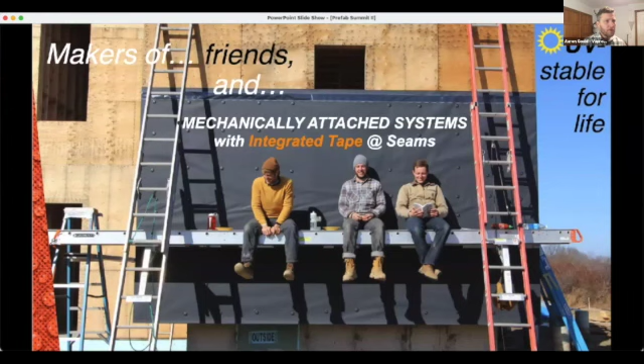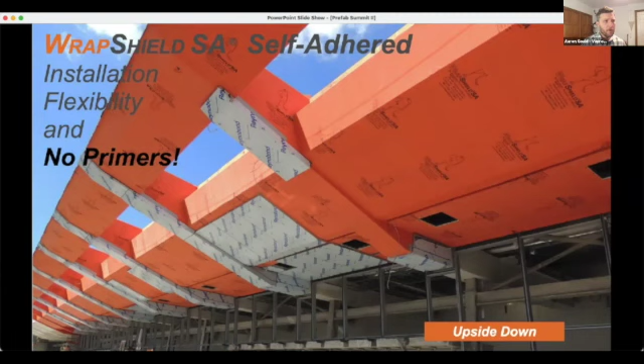We're primarily known for our self-adhered vapor open membrane systems with liquid flashing. We also have a stainless steel flexible peel and stick option. We provide a 20-year material warranty, and we can go up to 12 months of UV exposure during the job site. It's very simple: we have black for open joint rain screens, and orange for everything else. We have both mechanically attached or self-adhered membrane systems, again using either the liquid or peel and stick flashing options that we have.

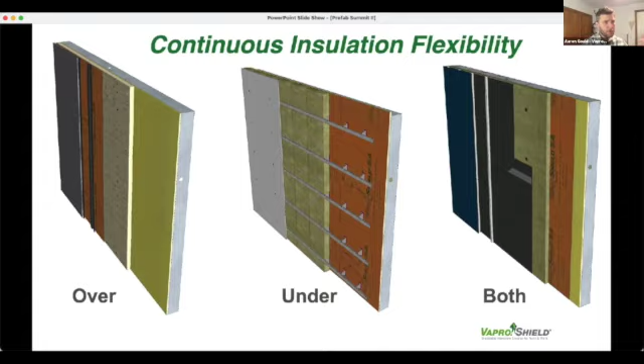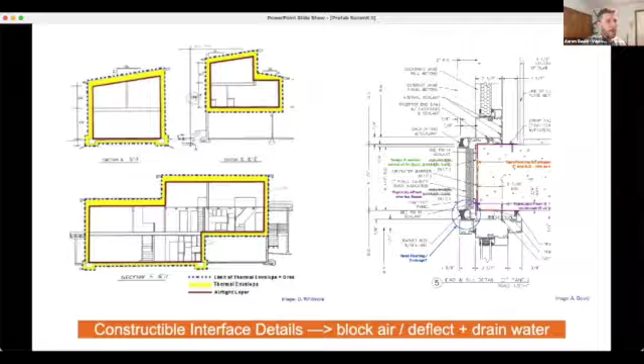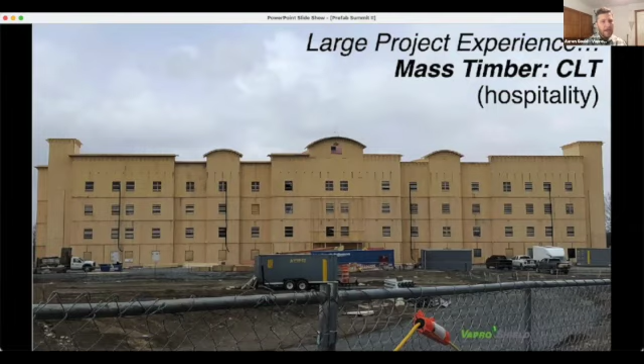We've been around the block. We've experienced a lot of large projects like Hudson Yards here in New York, a lot of mass timber. We've stayed at the forefront of that. We have an ideal solution for mass timber and panelized construction. I meant to actually have a photo of a current Passive House mass timber project we're working on - it's an 8-story building in New York right now.

But this is one that was recent, and I'll put a link up to this in the chat if you like - some of you were on this, the multifamily New Jersey project, the Condela Lofts, that was highlighted here a couple weeks ago.

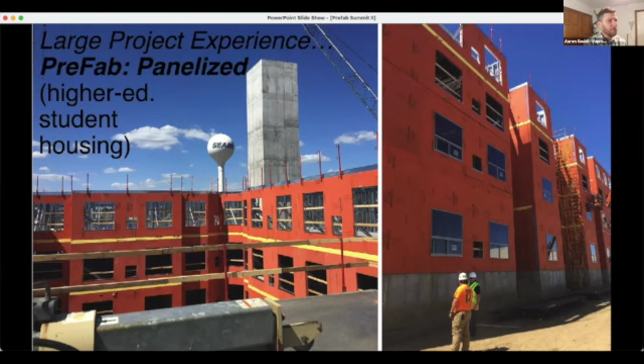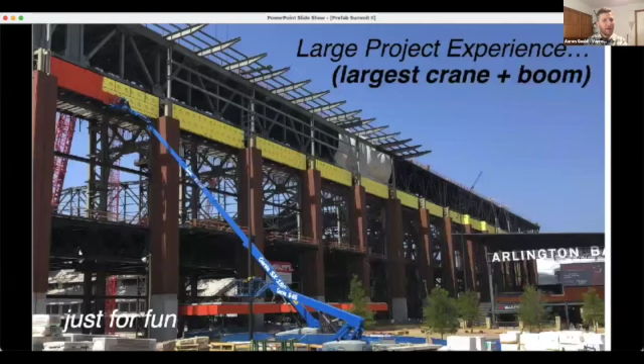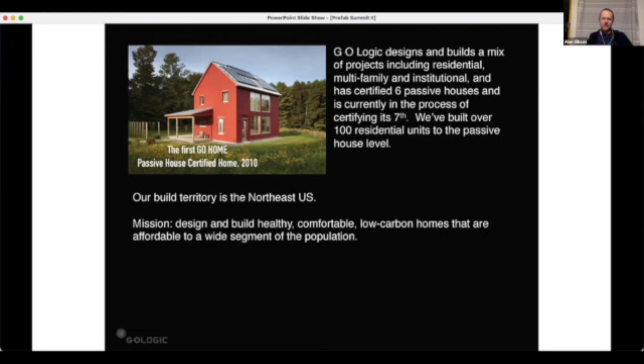Our build territory is the Northeast US. We are general contractors, so in Southern Maine we will general contract projects. Outside of that area, we will design and then deliver a shell package for others to finish. Our mission is to design and build healthy, comfortable, low carbon homes that are affordable to a wide segment of the population.

I'm not going to claim that we're an affordable home builder. We do a mix of projects, some higher end custom homes, some institutional work, but our bread and butter is single family homes.

To try to crack some of the affordability nut for Passive House, we developed the Go Home, which is a series of pre-designed homes, with models ranging from 600 to 2,500 square feet. We've built most of these multiple times.

The design process is much more streamlined because they're pre-designed, and we allow some customizations, but it allows the whole process to be more streamlined and therefore less expensive.

We've been panelizing in earnest for about three years now, really trying to go up that learning curve and figure out how to do it from scratch while taking our experience as site builders into the shop. My crew has really been figuring this out.

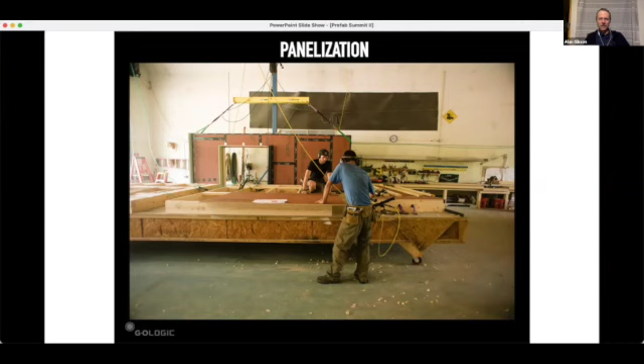Taking it from outside to inside, there are just great benefits. You're building not in the mud, in the rain, so you can concentrate better on what you're doing. We have a higher quality product. The thing about panelization that's different is you have to do most of your thinking before you cut your first stick. So there's a lot more pre-planning, and the shop drawing process is really important. That's another thing we've been working out, going from the architecture to 3D modeling and then shop drawings.

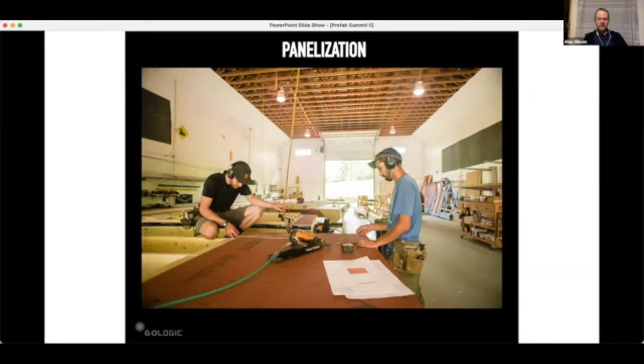We put absolutely as much as we can in the panel in the shop to make it a value-added product. We install windows and doors, air seal them, flash and put trim on them, and we add a lot of exterior insulation.

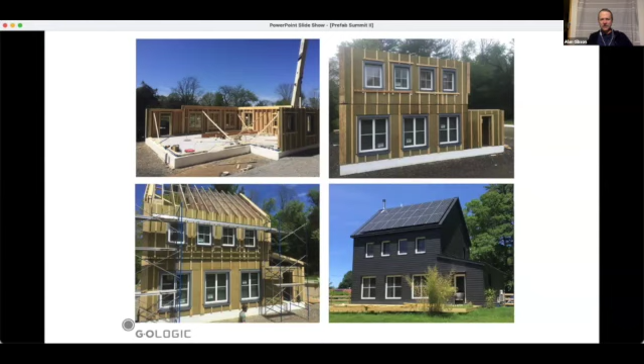Here's a typical build. This was out of state, so local GC did the foundation. We came in with wall panels, floor panels, roof structure, made an airtight, watertight shell, and then passed it on to the local builder who did the exterior finishes.

Here it is in the flesh. We use gaskets to join the panels. When we're done with our shell installation, we verify airtightness with a blower door test. We meet the Passive House standard. This is a fairly complicated thing. It's got a lot of layers, and it's all got to be right, or you're going to have a lot of mess on site. So that's really key to doing it successfully.

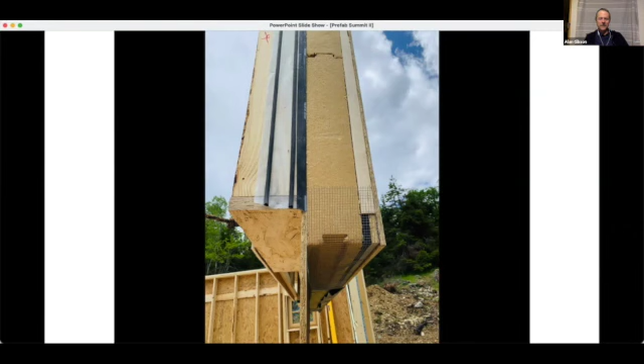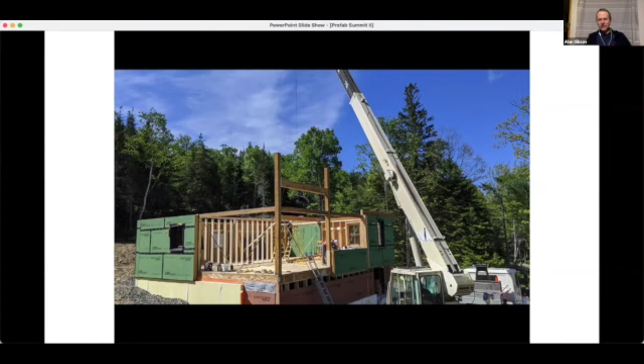This particular project had a second exterior skin because it was getting cedar shingle siding. This is an installation we did on a remote island in Maine, where the logistics were a nightmare, but the crew did a great job getting the panels in there and then flying them in to install them.

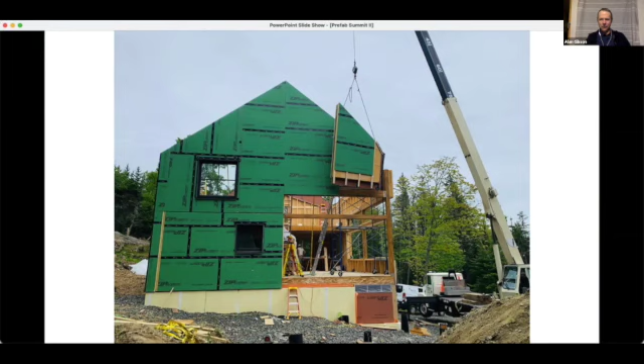One interesting thing about this project: you can see we put in as many windows as we could into panels, but there were some big expanses of glass we couldn't build, they were too big to put in a panel. So we're happy to do that, it's fine, but you should understand it's going to take more time and therefore be more expensive when you can't do everything in a panel.

The last thing I wanted to mention is panelized deep energy retrofits, which is something we want to get into. We did a feasibility study for a low-income housing triple-decker apartment building in Lewiston, Maine, and developed a potential wall panel that could skin the building and bring it to Passive House standard. We hope to do this project and more of these in the future, knowing there's a huge need for this.

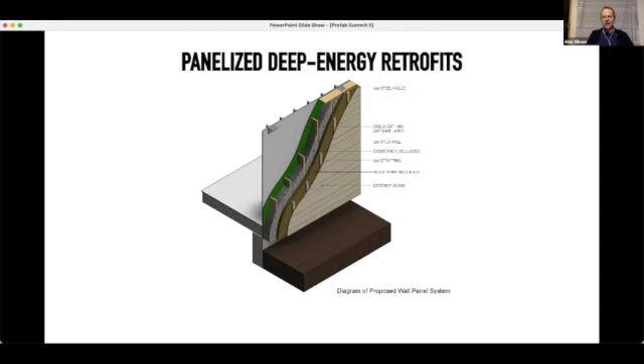Excellent, and I love the detail of the connection process there, Alan, and again, even the scale of the problem. We might come back to that in the question period. So thank you very much.

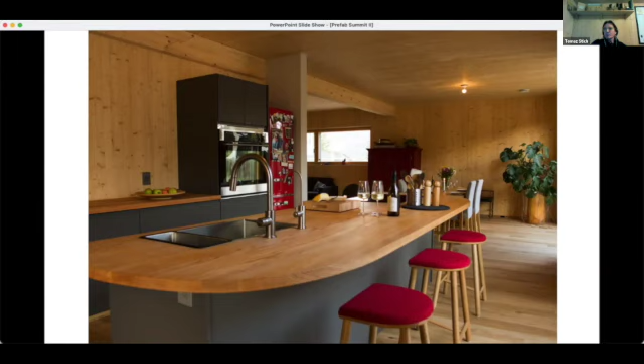And as I said, CLT's biggest advantage, I think, is it's your structure, it's your finish, it's your vapor retarder, it's your airtight layer, and you don't have to touch it anymore if you don't want to. And the structure is pretty simple - you can see the big drop beam in the middle. There are two posts, and it rests basically on the two posts and the exterior walls. Next picture.

Yeah, that's another pic from the inside. As I said, the wall that you see in the back is the east wall, so the window was built in, which you will see soon on a little time lapse. Window was built in, insulation was on. Okay, thank you.

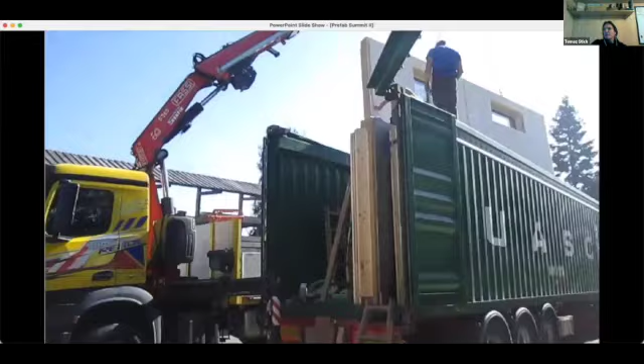This is Slovenia, where I'm originally from and where I have good friends that are carpenters and have a shop. I went over there last October and we loaded 4 containers in 2 days, basically, or 3 days. Again, here you can see the inside of one wall - CLT, solid wood fiberboard, strapping, and wooden siding in this case.

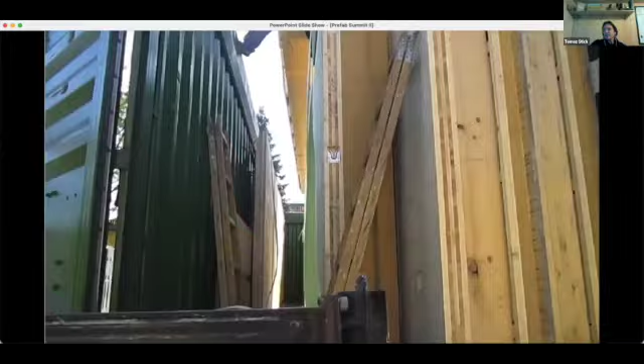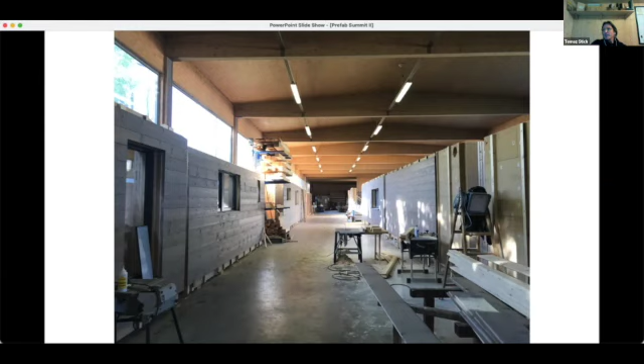Maybe next slide. So this is the shop in Europe, in Slovenia, with all the walls lined up, and you can see the siding. It's a pre-stained gray siding, solid wood fiberboard and strapping. Next slide.

So that's a time-lapse from our site. As I said, 10th of December in the Rocky Mountains, not the best time to assemble a house. We were 2 months late, I have to say, which is why we ended up in December. But again, 5 days, we worked long days, and it paid off.

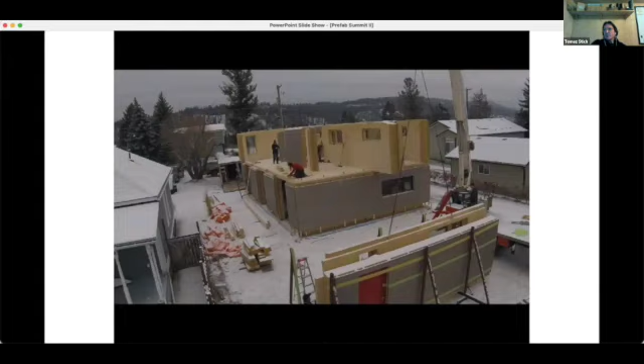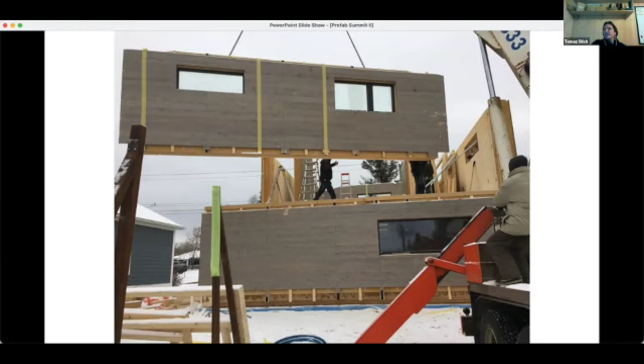So all the windows and doors were built in, except the floor-to-ceiling on the south side, because obviously there was no wall to build them in. That's the east side, upper floor east side wall - windows built in, siding on. The only thing we had to do later was attach the joints, the siding, which was delivered with the package.

Unfortunately, we didn't assemble the prefabricated roof panels just because of size and volume. We had cantilevered glulam rafters, so it looked like this for another month before we put down the solid wood fiberboard insulation and the roofing.

Yeah, I think that was the last picture. Is there one more, Zach? No, nope, that was the last one. Yeah, so thank you, Tomaz.

We started 10th of December and we moved in May. We are pretty much done. Everything works, except, as you can imagine, baseboards and some small things. But everything works and we are pretty happy. We're hitting minus 15 degrees now and it's good.

Again, we don't manufacture anything. We use different suppliers from Europe for CLT so far. I hope there will be more suppliers in North America that we can use. Other than that, we plan and design to a high level, and we can push the limits with windows built in, siding on, insulation on, if the clients want to.

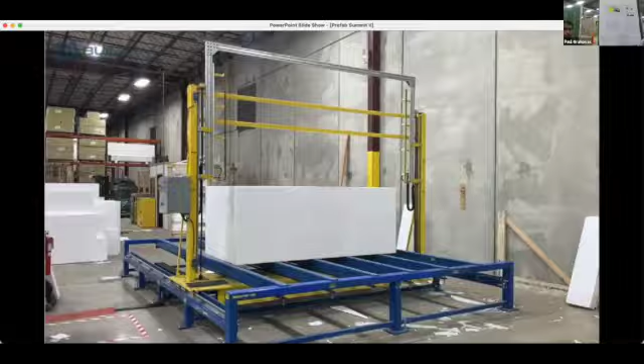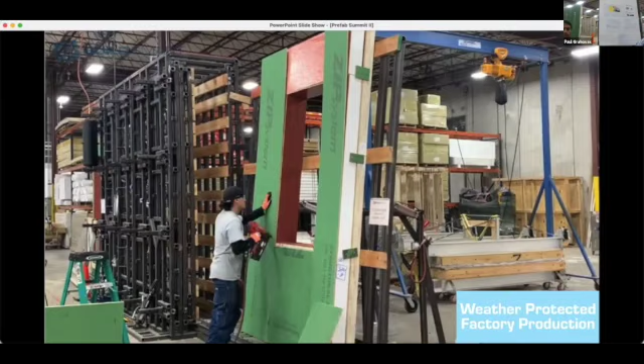Hey, listen, the way we are building right now with the Build Smart system is beautiful. I don't think we will ever consider any other way of building. The way it goes up, the way it goes together, the way it's tight, the energy qualities of it, it's the best system I've ever seen in my life.

A lot of trainees had never touched construction before, and there were things we had to do from the grading and everything, making sure it's level because of the components and the way it comes together like a big jigsaw puzzle. You are able to take less skilled individuals, bring them to the site, show them what needs to be done, and with the repetition of doing it one after another, you can assemble a larger project with less difficulty than you would if you were doing full stick built conventional construction.

Basically, I've given this paper at about a dozen conferences across the U.S. and maybe two or three times that for AIA presentations. I'll supply anybody who wants a copy of it. Basically, it's a financial analysis for prefabrication and multifamily, applicable to anybody doing prefabrication, multifamily, passive house.

Essentially, you end up at the end of the process - this is all backed up with articles and such, I didn't make it up - basically showing that you're spending 4.8% less for a passive house apartment building prefabricated than if you stick built it to code, and you're making 60% more cash flow on the operation of the building. So I'll just leave it at that. Anybody want a copy of the paper, just let me know.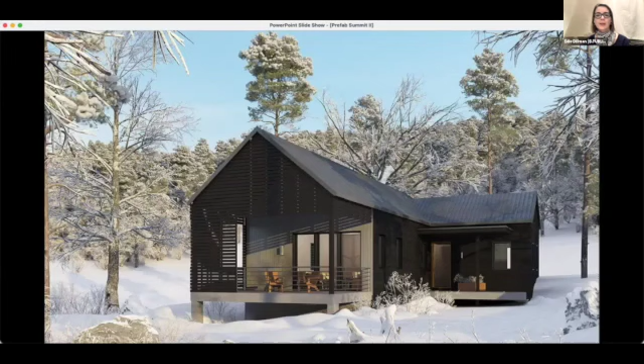A perfect example of this is contractors. They're our heroes. We are here supporting local builders to build faster, to increase finished projects every year, and a simplified path to performance, working with builders in partnership with either our licensed home plans or the plans that they have or their clients have.

We're working to decrease barriers in the design exploration. We provide tools for architects and designers to play with B.PUBLIC components from day one, offering related application details and options to allow for more open exploration for all size projects.

And what does that mean? It means we support and collaborate with professionals with ongoing envelope modeling and technical assistance from schematic design all the way through a project.

Addressing barriers in equal access. This is the big picture issue, and this is a future issue, and I hope everyone on the call, and certainly everyone presenting, is working on these issues. This is a movement, and we are just at the beginning of it in the US and North America. We believe that homeowners at all income levels should have the ability to make choices for building resilience.

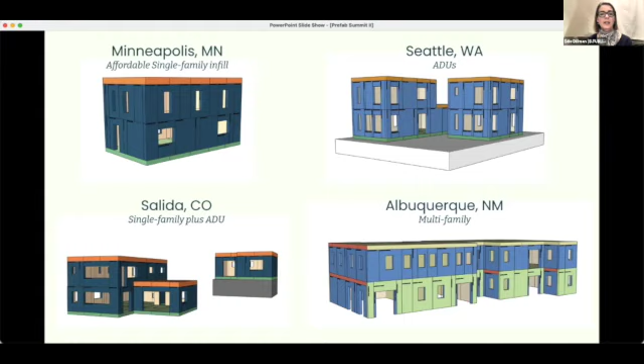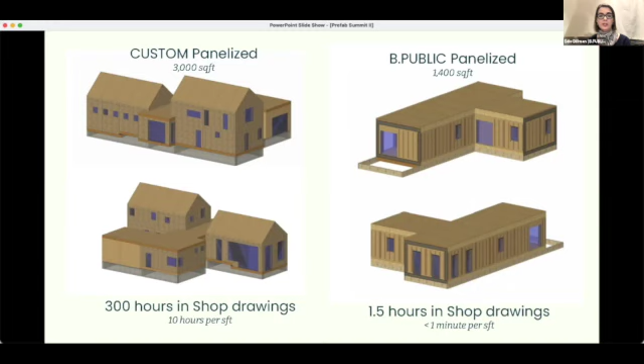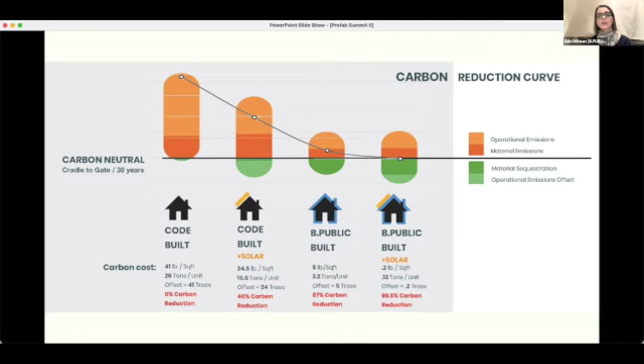And our last point about barriers, although there are many more that we're addressing at B.PUBLIC, the ones we've talked about - what does it mean when we remove barriers? It means that we are a positive disruption in the marketplace.

So B.PUBLIC, we have standardized a predictable Lego-like system. We also license our beautiful home plans. We design and sell our panelized building envelopes. And importantly, we support architects, designers, builders, and developers to work with our panels and prioritize better buildings and decision-making. So we work in very creative ways to remove these barriers, and we have built this company to put quality and craftsmanship at the forefront, and predictability of comfort, costs, and carbon savings available to the public.

Thank you so much. I look forward to Q&A afterwards.

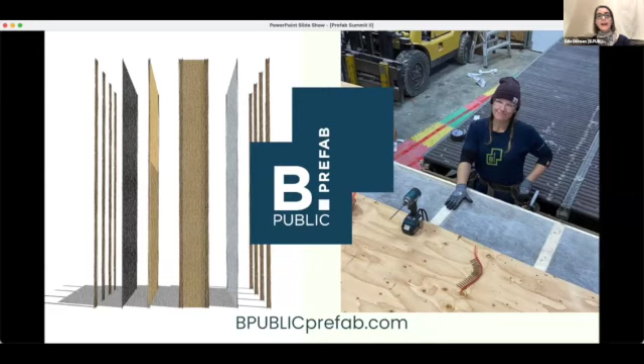Hey guys, yeah, I'm David, one of the co-founders of TAG Panels. We're based in Squamish. I'm also an architect and a passive house designer, owner of Stark Architecture.

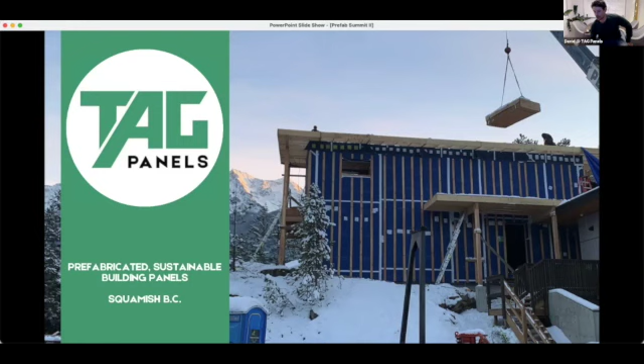Yeah, so TAG Panels, similar to some of the other panelists here, they're prefabricated sustainable building panels, enabling clients to meet the high performance building goals. Our kind of secret sauce, as we like to call it, is that we're co-founded by an architect, an engineer, and a contractor.

The build up - we've created a typical wall assembly. It's a bit of a misnomer because we customize them to each job. From the inside out, we go for OSB or plywood as our air barrier and vapor retarder, blown-in cellulose for the timber stud cavity, wood fiber to the outside, a high performance WRB, and then the strapping is shipped with the strapping on top.

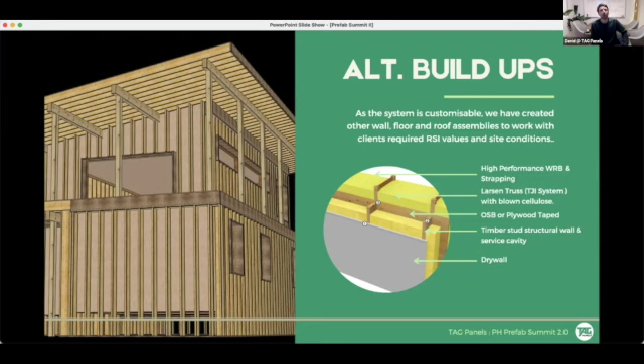We also do alternative build-ups. This was a Larsen Truss system project that we did. We've had some experience with it, but we really believe the 2x stud wall is best for transport, simplicity, and cost.

This is a little shot of our current operation. We started in a 3,000 square foot shop and outgrew that within the first project. This is a 10,000 square foot shop. We've got a 3-ton gantry crane that runs 70 feet along the length of the shop.

We have 2 separate tables. We can run 2 jobs at the same time, or more often than not, one twice as fast. We actually bring the semi trucks back into the space, and the piles of panels are loaded onto the trucks in reverse order, then shipped out as and when needed.

We have a Krendl insulation blowing machine. We've got a total of 13 staff at the moment - designers, production, and an install crew. And we have an additional 15,000 square foot shop coming online this summer.

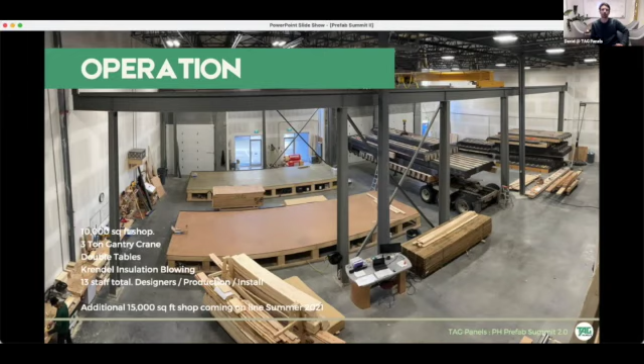Just some images of the guys installing. We're really big into the care and the precision, and it really helps when they're in a dry shop, which I'm sure you're all up to speed on now.

Our process, similar to others, we go through the needs first - those are typically from the architect or a thermal model to work out our values and what we need for the envelope. We then move into the modeling stage, using CADWorks software, which takes about 2 to 4 weeks.

We then do shop drawings, which takes about a week. It's quite troublesome getting architects and engineers to actually fully coordinate everything - they say they do, but they don't, and I can attest to that.

Then we go into fabrication - approximately 20 days for a 4,000 square foot custom home. Installation then varies between 10 and 20 days, depending on the complexity.

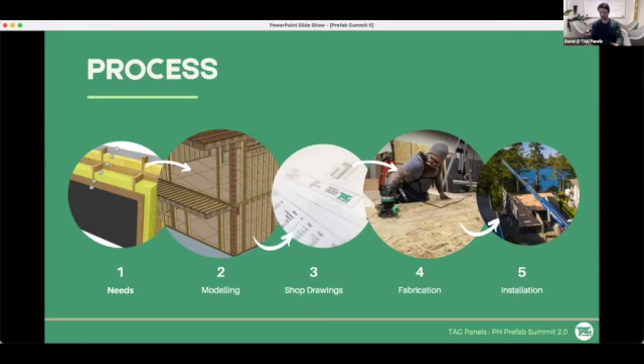Air barriers - similar to some of the other panels here, we're going for a multi-air barrier approach, but our primary air barrier is the taped OSB or plywood to the interior. The more the merrier when it comes to air barriers and tightness.

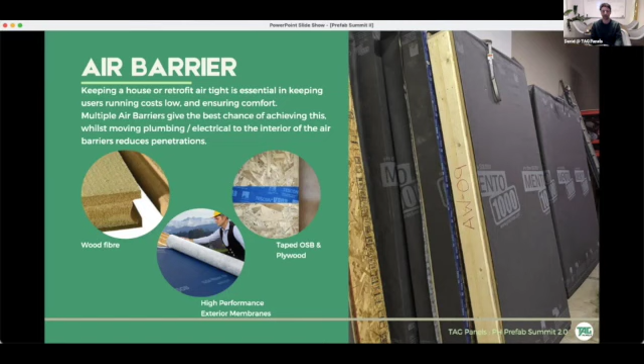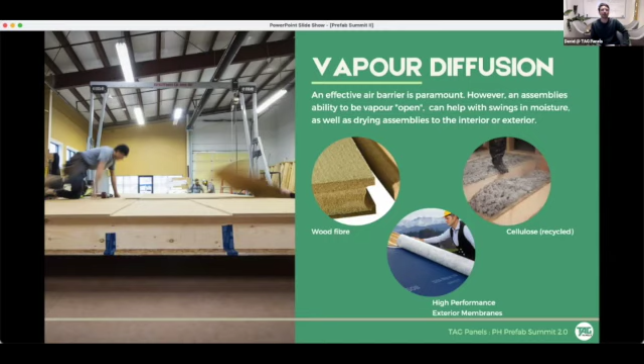Vapor diffusion, which was touched on before - these are vapor open, breathable. It would be interesting to talk afterward, but we've had problems with local authorities trying to get their heads around vapor-open systems and certain code requirements requiring specific perm ratings and materials. I'd be interested to see what problems other people have run into there, but we're facing some of those.

A couple of projects - this one's currently being built in Whistler. It's a 6,500 square foot house. We did the walls, floors, and roofs here. It's all sloped roofs with sloped top walls, lots of steel in here, so quite a tricky build. This one has to be a step 4 house.

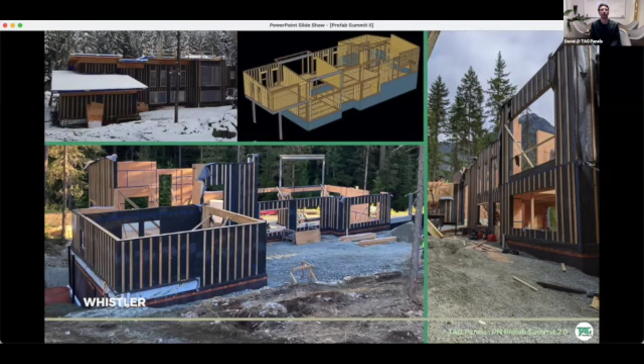This one's in Whistler again. You can see at the top of the screen the CADWorks model and various photos of the construction, and a final lock-up shot on the top left. What was interesting was this was a 19-day install start to finish, including the steel, and there were 5 neighbors here - not a single one of them managed to finish their timber framing before we got the roof on. So it really shows you the speed and benefit there.

This is a house in Tofino, 4,000 square feet, a very tricky site right by the ocean. This was primarily chosen because of the limited local trades - we teamed up with some local guys, but they just didn't have the volume of people to build a house this size, so the panels made a lot of sense.

This one's in Pemberton. It's a Larson truss system, 3,000 square feet. We did all the glue lam work in a race against time to get the roof on before the snow. This was about 15 days from sill plates to the final roof going on.

Upcoming, the multifamily area is a big new market for us. We're seeing lots of people reaching out with 100, 150 unit multifamilies. Custom homes are great, but they come with their own quirks, and I think the real power is going to be in doing those sorts of things for multifamilies.

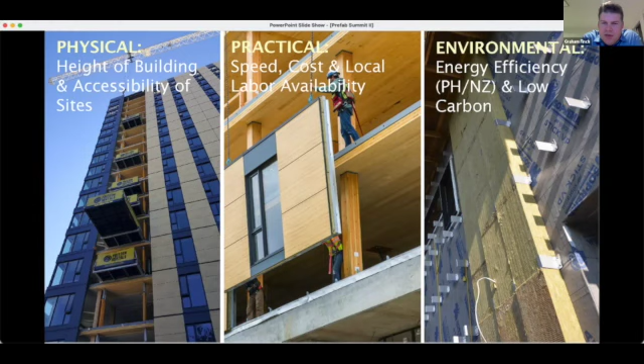The last factor is environmental. We're seeing more and more levels of insulation, increased airtightness, and low carbon, which puts a lot of things in the same basket. It's pushing us to be more creative to get control on the systems, but it's also a lot easier to install 10 inches of insulation on the ground indoors than on the side of a 30-story high-rise.

The other catalyst we're seeing right now is mass timber, which is driving this even further. Before, prefabrication for high-rises was becoming a given in some places but not in many markets. When you look at a mass timber building, it has to go fast for moisture protection, and the speed of the structure is quite quick, so you want to keep up with it. That's what's driving a lot of this recent change.

Two things to consider: existing systems, like small panels such as window wall and small precast, can be installed from small cranes—things like curtain wall installed off the slab edge of the building. Then there are very large panel systems, which is where a lot of development is going, where we actually have walls with the windows integrated.

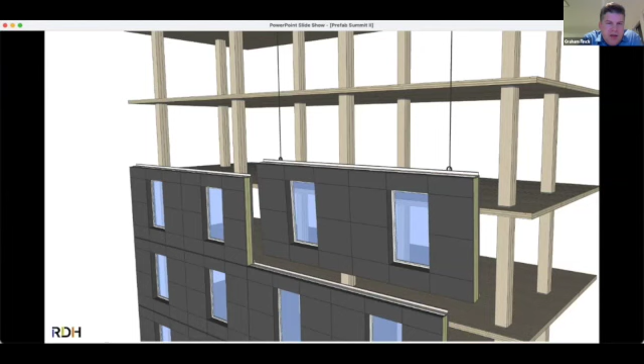There are a number of existing solutions already—this isn't new, prefabrication has been around for a long time. We can prefabricate out of concrete, steel studs, or curtain wall. When we talk about passive house, it means pushing the envelope in terms of thermal performance—thicker amounts of insulation, more exterior insulation with steel, thicker sandwich panels or more insulation in concrete, and higher performance curtain wall systems.

There's a huge opportunity. We have a number of passive house projects in the city of Vancouver underway, and the only way they're going to be built cost effectively is incorporating a fair amount of prefabrication. So right off the bat, looking at steel framed HSS frames with pre-installed windows, all exterior insulation to control thermal bridging, and then it's all about how you connect these together and what that looks like when connected.

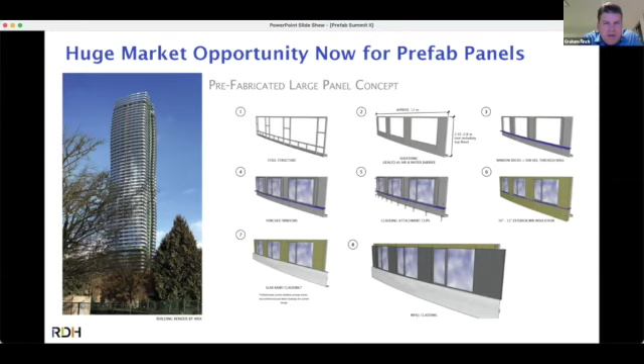And where we're going next is actually into mass timber facades. There's been a lot of interest in bringing wood into larger and taller buildings with mass timber, and we see mass timber structures going up all over the place. What we're really pushing on the enclosure side is how we do the facade systems out of mass timber.

We're looking at a couple of different approaches, whether it be a hung panel, like we see in the illustration here, which is essentially what we call curtain wood - like curtain wall, but hung wood. Very thin wood panels, whether it's CLT or mass plywood panel or other components, or load bearing. One thing about hung systems is they're not part of the load bearing structure, but purely a facade element.

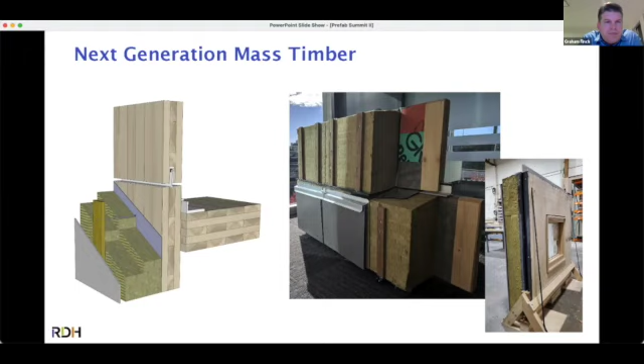The way these systems work is very similar to a lot of the technology we use in steel stud and precast: your wood panel, whether CLT or plywood or whatever component, large and strong, has factory-installed air water-resistant barriers, typically vapor permeable membranes, whether sheet applied or fluid applied. Windows installed to meet the specs, exterior insulation so you can leave the wood exposed on the inside, but also for durability. Then your cladding and finishes are all done on site. All the trickery comes into the joints and details.

There were some build slides there, but Catalyst in Spokane by Katerra, designed by Michael Green, was one of the first larger examples of this in the US. Two-story tall, 30 foot tall by about 8-foot panels that came together on site. The cladding and windows weren't pre-installed because the cladding was terracotta and the windows were too large to lay down flat and then tilt up. But it's the first example of that.

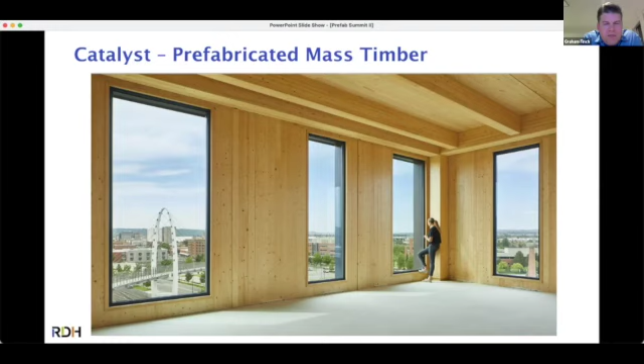And where we're going next - I'll talk a bit about this project. Canada's Earth Tower project is a proposed 30 to 40 story passive house mass timber project in Vancouver, British Columbia.

The competition part of this project was for teams across Canada and the US, and I reached out to many people on this call, and we probably talked a few times. The idea was we needed a team to develop a mass timber facade for this building, for this project, that would meet a passive house design spec for thermal insulation, air tightness, be cost effective, and meet all the fire and performance requirements for a high rise.

We had 6 teams from across Canada and the US enter the competition, 6 very strong concepts. 3 of those concepts went to the next phase, sort of a semi - the three sort of winning teams. And actually, in my eye, all 3 were completely viable options.

We have mass timber with exterior insulation, partially exposed or fully exposed wood on the inside, windows pre-installed. Each of the teams had slightly different connection and details, but essentially that proved out that this could be done. We have tons of projects we're actually looking at right now before this one where we now have options. So we actually now have high-rise mass timber facade systems available in North America.

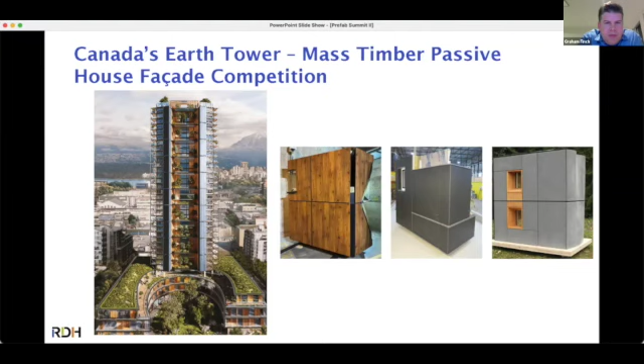And the three winning teams were Katerra, Element5, and Sidewalk Labs. We'll be going forward next with the next phase here, and then this project will eventually be built with one of those systems. So that's it - but there's a big horizon ahead, big buildings, and a whole other thing to think about here.

Excellent, thanks Graham. I think we got Travis. Travis, are you there?

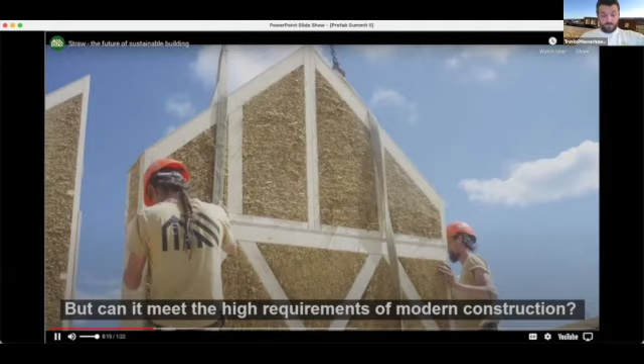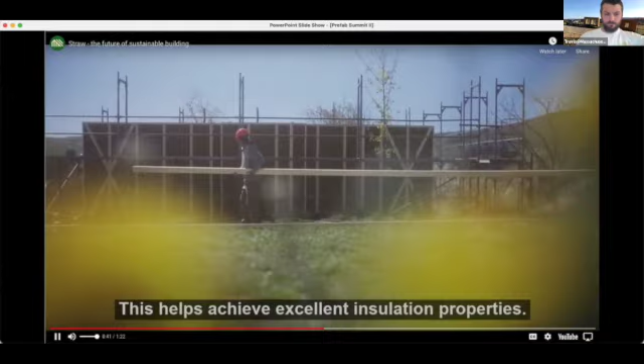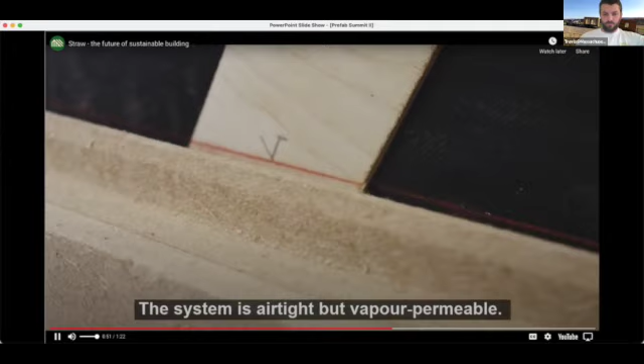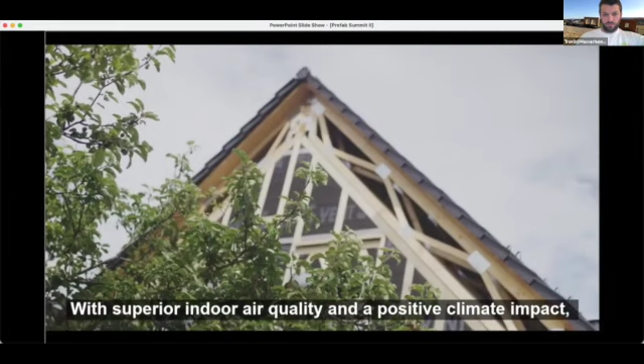Often underestimated, straw hides a real treasure. Its unique cellular structure, full of tiny air pockets, makes it a great insulation material. Straw has been used in construction for millennia, but can it meet the high requirements of modern construction? Our wall panels consist of 98% wood and straw in their natural state. We want to show how well-known natural materials can constitute the building blocks of any sustainable construction. The wooden frame provides structural support for buildings up to 6 stories high. The panels are filled with straw at very high pressure, helping achieve excellent insulation properties. Together with a wood fibre layer, an airtight membrane, and an interior clay plaster, the system meets the strict requirements of the Passive House standard. The system is airtight but vapor permeable. It allows excess humidity to escape, and with no thermal bridges, it leaves no space for drafts or mold that is often present in modern sealed buildings. To accommodate any type of building design, the panels are made to measure for every project. With superior indoor air quality and a positive climate impact, Ecococon provides a healthy and sustainable alternative to conventional construction.

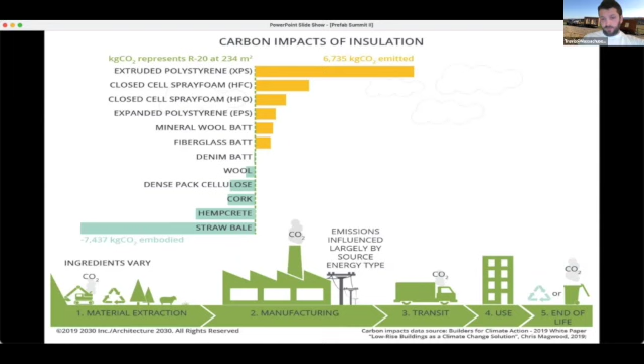So just a little bit more about the panels. They're really adaptable to any size, with customizable dimensions down to a millimeter. It's very simple and quick assembly using basically just a screw gun, and they have very flat and homogeneous surfaces.

A standard panel, just under 16 inches thick, gives you an R38.3. With the wood fiber layer that we typically use, a 2 1/4 or 2 3/8 inch wood fiber layer, that brings it to an R47.

As I said, the panels are highly CO2 negative, so we can justify for a certain period of time transporting them across the ocean because they're currently manufactured in Europe. We've done some studies, and you'd need to truck them over 3,730 miles to achieve a negative CO2 output.

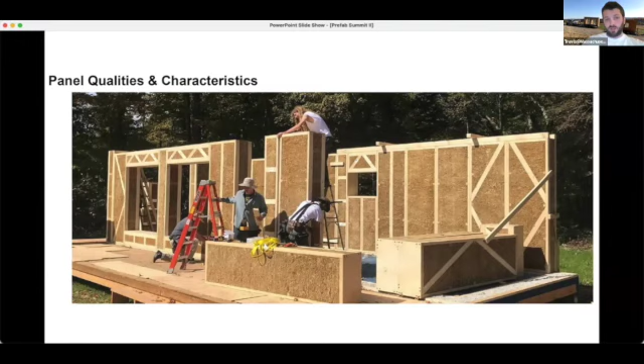That's about 165 pounds of CO2 sequestered per square meter in the panel, or 8 tons in an average house. So our goal is to bring these into the mainstream and have it as a viable option for designers and builders across the states, and eventually move toward manufacturing. It's a cradle-to-cradle certified product, a Passive House certified component, fire resisting tested, seismic tested.